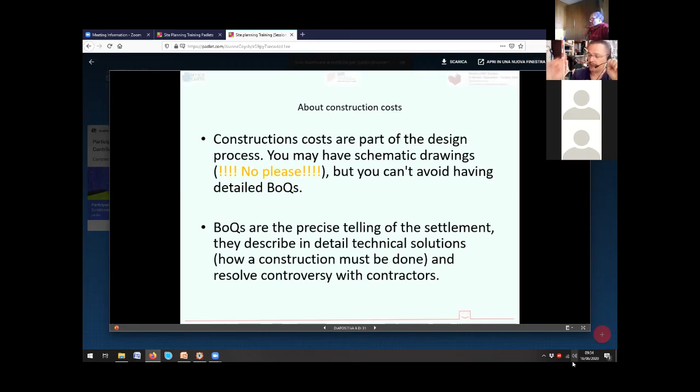About maintenance costs and the settlement maintenance plan - this is something we also might think about, because it's definitely a very important element of your design planning. So how do you think we can calculate maintenance costs? When you've done the design of an emergency settlement, do you think it's important to come out with an idea of how much the settlement is going to cost over the weeks, over the months? Any idea, guys?

What do you think? This is based on the type of infrastructure implemented on the site. For example, if we have a drainage system inside the camp, like open channels, we expect sedimentation will fill these channels over time, and you can determine from time to time when you need to clean them.

Then you can hire laborers, maybe weekly or based on frequency, and do this maintenance for these channels.

On the other side, maybe the camps are not compacted well, so the graveling is not well implemented. You would expect some swamps after the rain season, so you need to do graveling again and fix these poles or swamps. It depends on the type of infrastructure inside the camp and how the quality is implemented. Then you can estimate what type of maintenance is needed and the frequency for the maintenance, and allocate the cost for that if it is available.

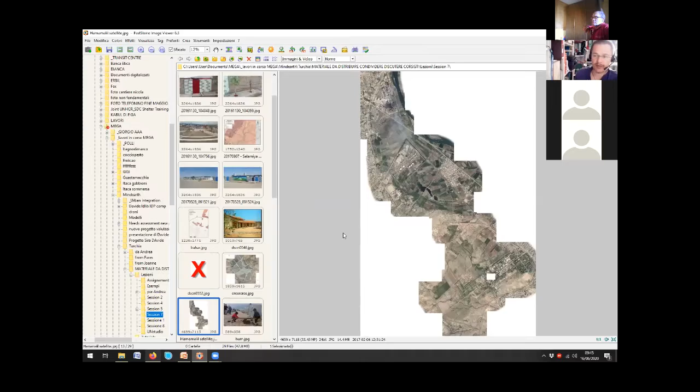Going back to our slide - to design the settlement accordingly, we made a quick analysis. It's not rocket science, it takes maybe 1 hour through satellite imagery, because we didn't have the chance to make a detailed survey on the ground - in this case the settlement was close to Mosul, where war operations were still ongoing, so we had to rely heavily on satellite data. We did a simple analysis, studying what was there: existing villages, some resources, existing paths, islands on the ground, and eventually...

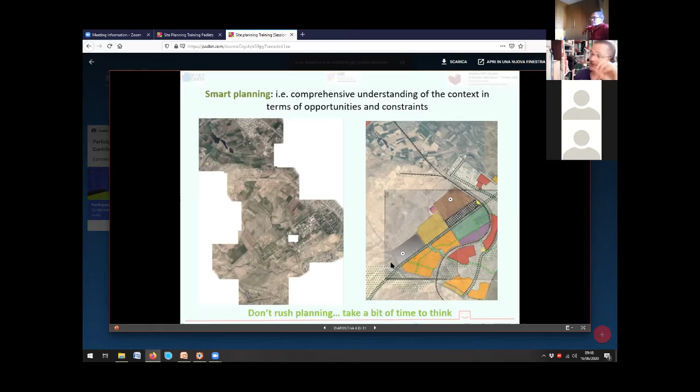By the way, this is to say: don't rush planning, take a bit of time to think about it. We had this time - using these tools can give you time, and so we designed accordingly.

We eventually came out with this design that, as you can see, is a very emergency settlement, but still takes into consideration the elements we identified by analyzing the data. I didn't include all the surrounding area here, but it was important to focus on this settlement. Any questions, guys? No.

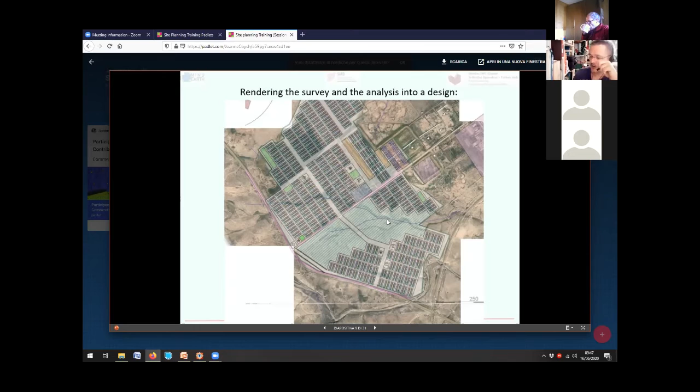Okay, so basically if we got the survey, we cannot make a confusion between geometrical survey and context analysis. The geometrical survey, which is the topographical survey, should be as precise and detailed as possible. It is the grounding for technical design.

During the first week, if I recall properly, we matched a survey made with the total station, the contour lines, with the one made with satellite imagery. We have seen that they didn't match quite well, which means we cannot just rely on satellite imagery, but we have to commit ourselves to a better topographical survey. Otherwise there is no point to do that.

If I have to do a drainage system, which is one of the vital elements of my settlement, we have to go for a very detailed survey.

And then there is the context analysis that aims to identify the opportunities and constraints. It can be facilitated by using GIS, we have seen it, because you produce documents that can be shared with your concerned colleagues and discussed in the perspective of settlement management and the settlement's future. The context analysis really helps you give a perspective that you can look at, and this is kind of important.

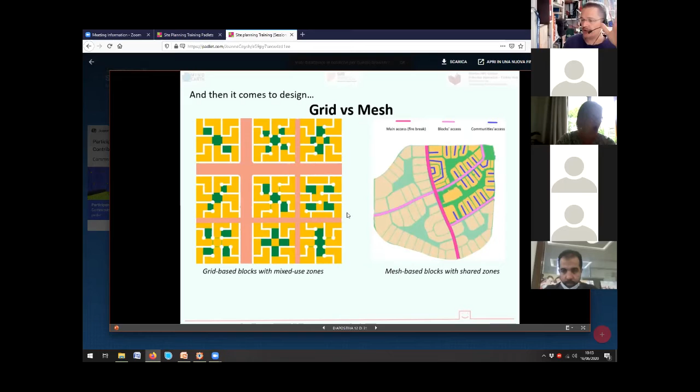Basically, we have discussed why we are more or less tempted to design using grid as a guiding method rather than mesh. Here you see a grid-based blocks with mixed-use zones, and on the right side mesh-based blocks with shared zones. Normally when we design settlements, we are tempted to use this orthogonal way of making grids and roads to design communities accordingly. This is just a conceptual layout.

On the right side, this kind of design, for example, might use the main access road as a fire break, then we have the block access, and then the community access, which are kind of semi-private spaces. So I would say one is more functional, while the other is more organic, but it's important to know they each have their own logic.

It is up to the planner to make a choice based on operational necessities and context analysis. So one is not better than the other, even if personally I prefer when we can apply a model that adapts itself to the context and what we've identified during our analysis. Otherwise the camps will look the same as one another, and I don't know whether that is completely positive.

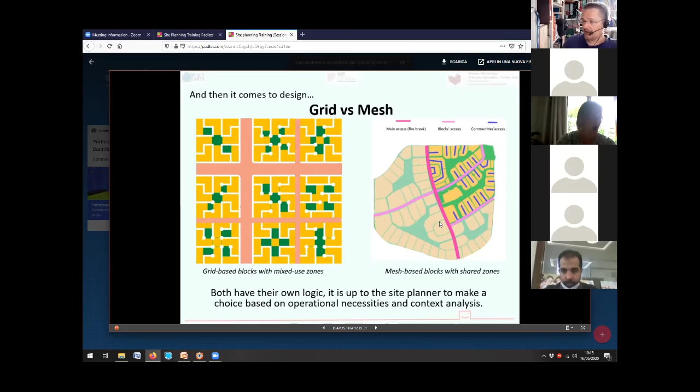Absolutely, absolutely. Any other comments, guys? In that case, I will carry on. And in fact, Andrea, there is a workable hybrid solution, which is organizing grid-based blocks design within a larger mesh-based layout, which is basically this one.

This is just to compare two different kinds of approach. The one on the left is a strict grid. It doesn't take much into consideration a river, which is a natural border that you cannot pass, but anyway this is the way it's planned. It's easier to plan, easier to calculate, and easier to construct.

But then we might adopt a kind of hybrid solution in which, as you can see, we are still having a grid structure but at a smaller scale, while the bigger scale is mesh-based. In this way, the grid facilitates construction, for example block by block or sector by sector, while mesh encourages physical and social bonds with the context.

I'm pretty much confident that this kind of approach, incorporating elements on the ground and linking the settlement with its surroundings, can favor much more resilience than the strict grid, from a spatial perspective.

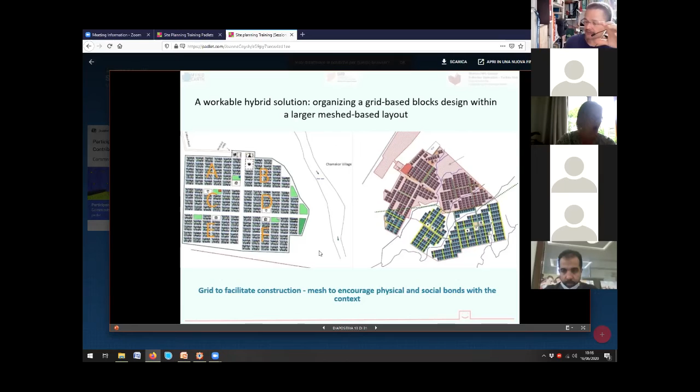So the only element that we have uncertainty about in our project is time. We do not know how long our settlement has to last. Is there anything we can do about that? Any idea, guys? Any thought? Anything? No problem, you have spoken too much today.

I believe that designing in synergy with the context improves the chances for resilience and future development. And this goes back to what Joanne was saying, that we have to rely on the resilience capacity of the community.

That's the best option that they have. If we can enable them to carry on their own activity, to become self-sufficient and independent as much as possible, and stop relying on direct help like money or whatsoever, that's the best achievement. If our design can favor this, that's the main goal. We can say we have done the best design ever possible considering the context.

Then I want to quote you a sample with an emergency settlement which has been designed having the context in mind. I won't go too much into details, but just to give you an insight, as you can see, this is an emergency settlement, an IDP camp, taking into consideration some very simple and basic elements on the ground.

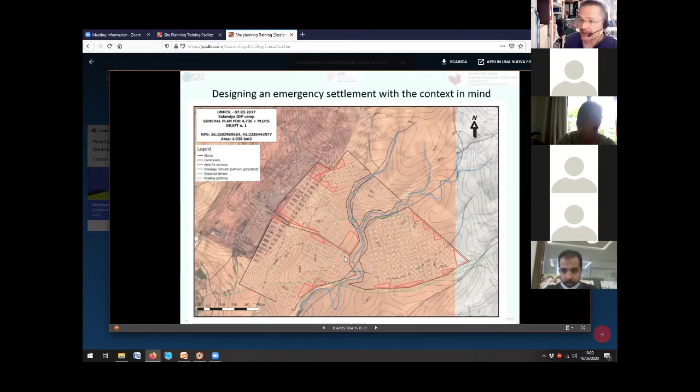And if we look at this settlement from a wider perspective, when we designed it, we tried to apply what is called the master plan approach, which is a discussion ongoing within UNHCR right now.

If you look at the settlement, this is the one which has been designed, but the position was kind of peculiar. For example, here we have one fairly big village close by, another one over here, and a third village over here. These two villages are basically very close to one main road which communicates with two important cities - this is Iraq specifically - and on this side we have the Tigris River, which represents a great opportunity in terms of income generation, because there are a lot of seasonal workers occupied in agriculture. It's a very fertile, very green area.

So with potentials, as you can see here, there are already some natural streams that get into the Tigris, with paths that go into the river. There are also some existing pathways that people living here use to walk from one village to the other. So the settlement, when it was designed and realized, was precisely in the middle of this system, and this is just a scheme to represent it.

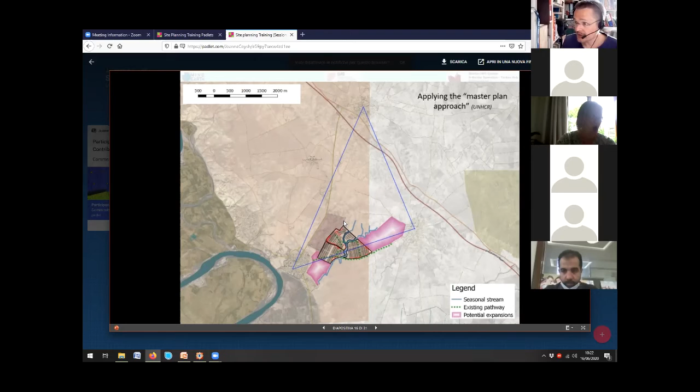So I would. And here it comes to the settlement, how it looks now. Despite all the context analysis and thoughtful design, the settlement was eventually dismantled by the authorities, which is actually a good thing - if the people can go back to live in their areas of origin, this is the best option for anyone.

As you can see, you can put all the effort possible into designing a settlement which is the best possible compromise, considering the emergency. But in this specific case, the settlement itself was dismantled. I'd just like you to notice, for example, this settlement which was designed by me, by us, by my team, which takes into consideration some elements, as you see here - the grids, the existing paths. I might show you a better picture, which is this one.

Okay, as you can see, the camp has been dismantled. This is thanks to Yandex that provides very nice and updated satellite imagery. But very basic elements - you see all the existing paths which were taken into consideration during the design of the settlement. Even this road, there was already some elements on the ground suggesting where to place our emergency settlement. You can compare with the one made by the local authorities, which eventually, as a camp management, was incorporated into the bigger camp. But I recall precisely that the camp management for this part of the settlement, which is clearly overcrowded, clearly not enough, not adequately organized - camp management over here was a real issue.

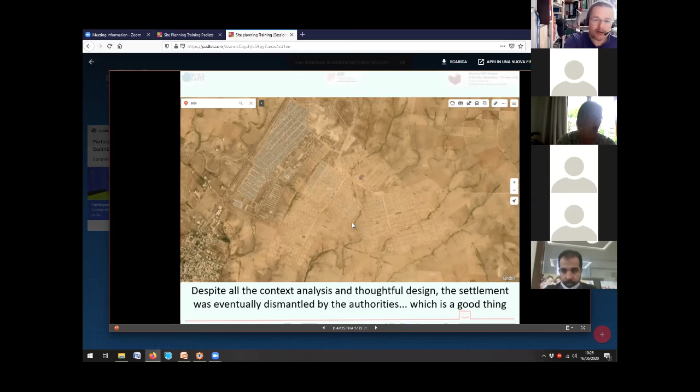I think I have to speed up a little bit. And then I want to show you a completely different case, an open question, but I have no answer for you probably from an operative perspective. Joanne, sorry, are you with us, Joanne? Yes, I'm. Yeah, sorry. Okay, sorry for asking. So now we can.

I just want to show you a completely different approach in site planning. The open question is whether smaller is easier. Yes, can be definitely yes from a pure practical perspective. But not necessarily - so I just want to show you a case study.

It's a small emergency settlement that was designed - I designed it in a way that it had to last, we knew that. The context was completely different. This is the settlement, as you can see it's not very big. So the dimension definitely gives us the opportunity to design it more carefully.

This design was for after the tsunami in Sri Lanka, where many fishermen and families along the shore had lost their houses, completely destroyed by the tsunami. So the government decided to build new villages - at the beginning kind of emergency settlements, and then that would eventually become new villages more inland in a more protected area. Apart from that, there were political issues. As you can see, the layout is not a grid at all.

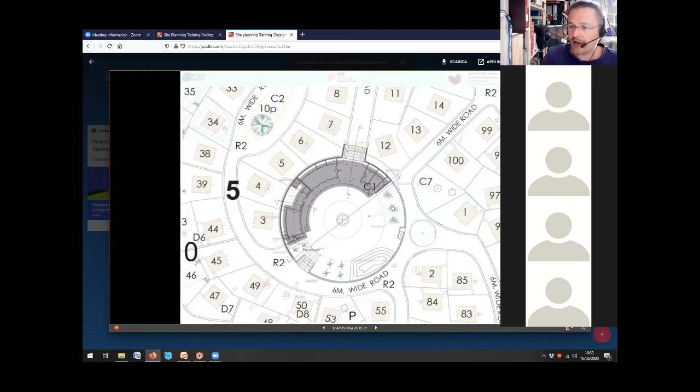I think this is it for the settlement. I will carry on unless you have any other questions. I might have some photos - I put some photos over here, guys.

The Sri Lanka environment is a tropical country, so it's easy for the trees to grow rapidly and in a very rich way. I wish that every single settlement, even emergency settlements, could have the chance to evolve into something really nice. Any comment on this, guys? Okay, no, I'll carry on.

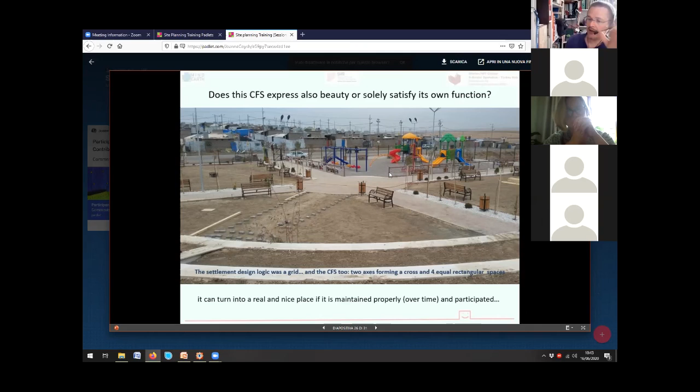So, of course, this place can turn into a real and nice place, but only if it's maintained properly, there is community involvement and participation. They don't spoil it over time, they keep maintenance of the infrastructure, they enable the trees to grow, so they take care of them. But even the designing of the child-friendly space is an occasion to break some customary rules, like in this case the grids, which has not been taken in this specific case.

So basically, the people live in a grid frame environment, and they again move in a grid frame environment. Just a side consideration regarding this settlement, as you can see, it was fairly isolated from any surroundings, basically in the middle of nowhere. So there was a need to balance the fact that the dwellers here have limited chance to interact with the surrounding, at least walking.

And so this forced the approach here to increase the efforts and investment for these kinds of resources. Is it good? Does it have side effects? I think so, but still it's important to be conscious of all the process that we put in place when we design these kinds of camps. Site planners have a central role, so you can raise the issues when it comes to camp management. What do we do? How do we improve this settlement? This is definitely very important.

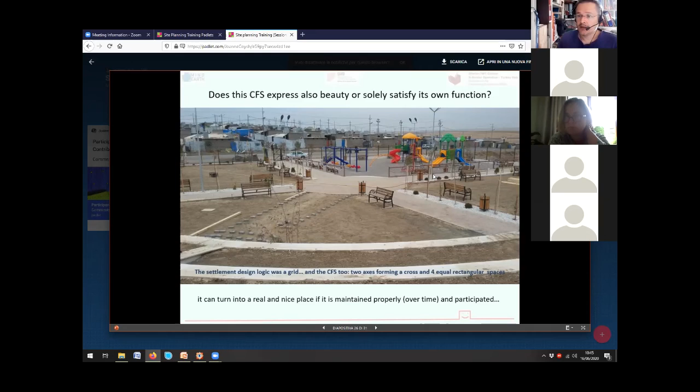It means that, even as a site planner, we might have a say: guys, can you make it a little bit nicer? Because I strongly believe that beauty is dignity. If we want to provide dignity, as someone mentioned at the beginning of this session, and I totally agree, we have to put a little bit of effort into this.